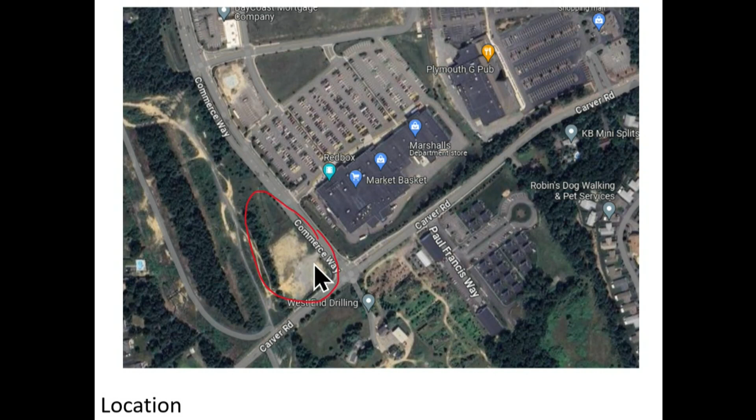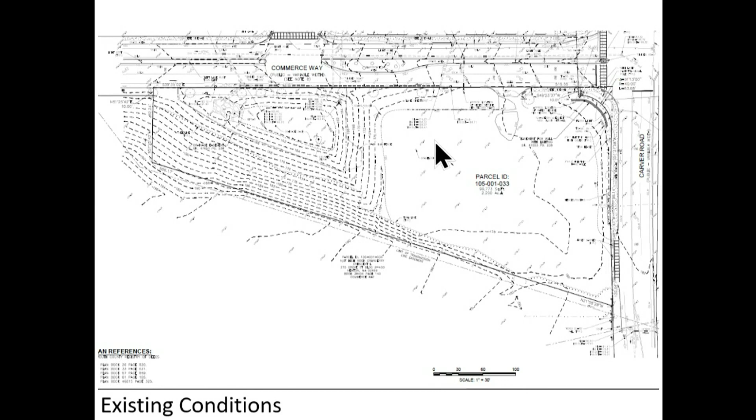So here's the cleared site, about 2.3 acres, a portion of which has an existing drainage swale. This is the development pad. Again, existing conditions - you saw the satellite image, but here we go. You can see on the topo there's a depressed area for drainage to the north of the site. This site close to the corner is the portion proposed for development.

Here's a colorized plan. This wasn't in your package - we pulled this together to give a better visual aid. Incidentally, this also does supplement the landscaping, which was one of the West Plymouth Steering Committee's requests. GPI can get into that, but you can get an idea for the layout here.

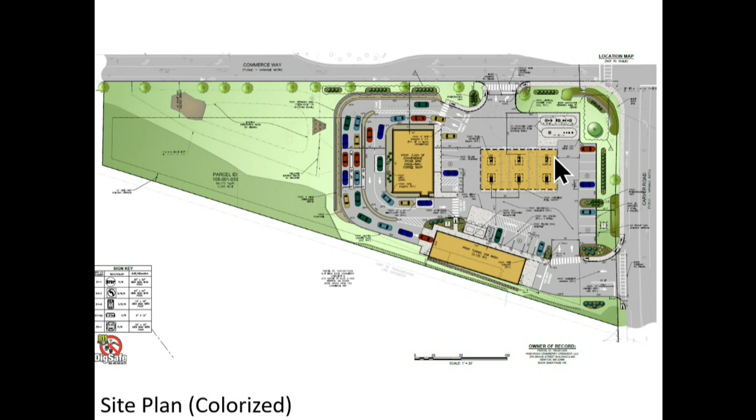I won't belabor it since you've seen it in your plans, but as an overview, you've got the fueling stations here, 6 pumps. You've got traffic circulating through the site, some of which may go through the car wash, some through the drive-through for coffee, and then parking around the site for the convenience store. You can see the 2 curb cuts here onto Commerce Way and onto Carver Road. I'll let GPI walk you through that in more detail, but wanted to give an overview. I can pull this up if GPI would like to direct you through the plan.

Going through, we've got grading, drainage plan. This is that original landscape plan - it's not colorized, so maybe not a great comparison, but I'll scroll down. This is the new plan. We did beef up the landscaping quite a bit in response to one of the concerns expressed by the West Plymouth Steering Committee.

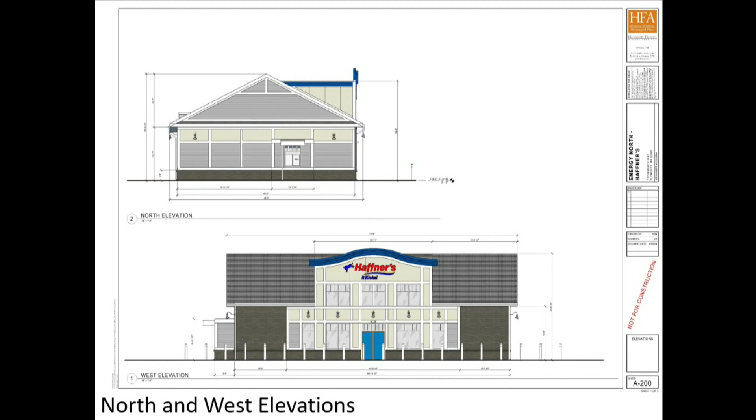Let me see - got some elevations here to show you. I don't know if these made it into your packet. I think they did, I think they were part of the plan set you received. This is what the Haffner's branded convenience store will look like when constructed. Got a couple elevations here. Don't want to spend too much time.

I think one other thing that bears mentioning on this project is, not only is the use and the site permitted under that existing special permit - we're back to satisfy that condition and show you the specific use proposed - but in 2013, the ZBA, subject to advisory vote from this board, did approve a quite similar proposal, actually for a bit larger of a structure. It was a single structure, 6,800 square feet, that sprawled across the site a bit more and had tighter ingress and egress from the 2 streets that it abuts.

But again, that was a similar project in the sense that it had the car wash, the convenience store, and all the fuel dispensers. So I'm hoping that we're not breaking too much new ground between the existing special permit and the subsequent permitting history of the site.

But that's the overview I wanted to provide to you. And if I could, I'd like to turn it over to GPI. They're here on Zoom, and they can walk you through more about circulation of the site and speak through a couple of the West Plymouth Steering Committee comments that I'm sure you'd like to hear about. Thank you.

Okay, thank you, Rob. For the record, my name is Chris York, I'm with Greenman-Pedersen. Rob, can you bring up the old TEC plan, or should I just share it? There it is. I can do that, and I've got the overlay too, Chris. I don't know what you'd like to see. Sure, yeah, we can start with this one.

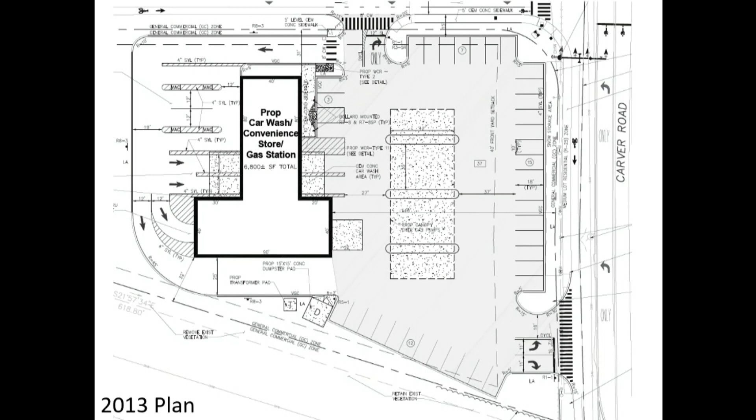Some of the big changes to the plan that I think make our plan a lot better, ultimately, is the pavement setback. As you can see, the red is the original TEC plan. We're holding a 20-foot setback from pavement to the edge of the right-of-way. The old plan had 7 feet along Carver Road, so there wasn't a whole lot of green space along the perimeter of the property. Another concern on the old plan was cars coming up Commerce Way, turning right into the site in order to get into the drive-through.

They almost had to do basically a U-turn, a 180-degree turn, to get into the drive-through. That's a tough turn — it would have been a tough turn. They wouldn't have been able to stay in their lane on site. It could have caused some issues out on Commerce Way with cars turning slowly into the site.

Our design has a much more gradual entrance into the site. The drive-through is further into the site, so it gives cars more room to maneuver into the drive-through lanes for the car wash or the convenience store. Again, the other main concern with the original plan was that the exit for the car wash dumped out right into the canopies — not the safest design. Our car wash is down here, kind of out of sight from the rest of the site, with a safe entrance and exit into the car wash.

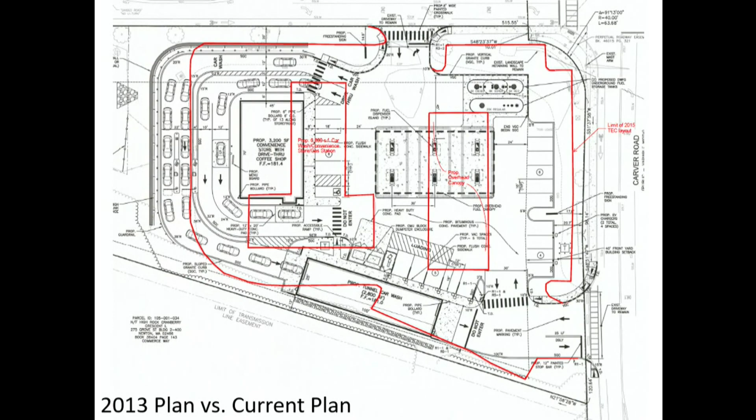So just wanted to point out some changes to the plans. I think it's a better design than was originally approved. I went to the West Plymouth Steering Committee about a month ago. They definitely raised some concerns, and some of them were warranted, so I can go through a couple of them.

On landscaping, they brought up that they wanted more landscaping shown, so we updated our plan — that's the colored plan Rob showed you a few minutes ago. Along Commerce Way, there are existing street trees that will remain. On our newest landscape plan, we've added some new low-growth shrub areas in between the trees to augment that landscaping.

We added some landscaping behind the existing Cranberry Crescent entrance sign and wall, including another decorative tree. In addition to what was already shown on the landscape plan, some of the interior islands are landscaped, and we added some landscaping along Carver Road. So I think this site is pretty well landscaped.

We can certainly take any more feedback from the planning board, but we definitely wanted to address the steering committee's concerns by adding more landscaping. Their other main concern was interior circulation, which I didn't ultimately disagree with. Their concern was cars coming out of the drive-through, and cars coming in from Carver Road into the site, with the possibility of cars coming head-on into each other. We talked about this after the meeting the next day, and we're definitely willing to add some internal circulation signs.

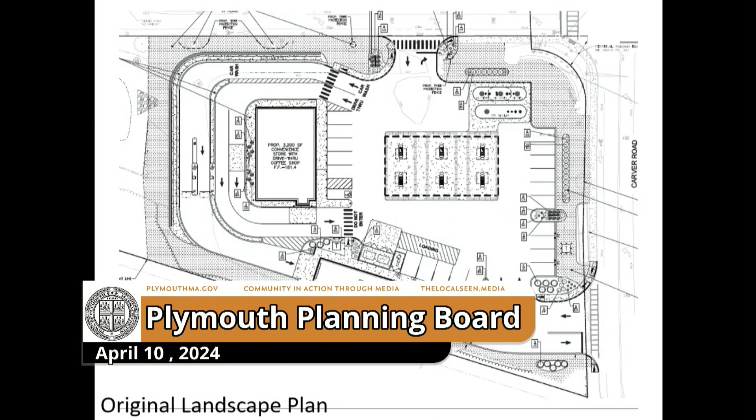Go to the landscaping one. Does it show the cars on the landscaping plan? No? Let's see, I think that's a bypass lane, Carl, in case cars get stacked around right there, just in case someone wants to get around and through without ordering a coffee, if the line's too long or something, they could come through. Is that correct, Chris? Yeah, it just serves as a bypass lane in case someone needs to get out.

It's the same idea with the car wash. Once you get through the pay stations, there's still an emergency exit right before you get to the car wash tunnel. So we're not seeing an emergency exit from the car wash, and that was going to be my next question. So if I get stuck in those 2 lanes of the car wash, and then I decide I don't want to go in, where's my exit?

So I think, Carl, you could cut across this hash-marked area. So that hash mark area? Okay. Yep, that's a paved area, just painted lines. Yep, that is your way out. All right, I just wanted to, okay.

For me, I'm only speaking for me, everything on that left side with all the vehicles just looks busy. We shouldn't have put so many vehicles on the plan. Yeah, it just looks busy, and I could see how it could be confusing, especially as you're coming into the property and also trying to leave the property. So I was just wondering if that extra lane was needed, maybe to reduce confusion or reduce so many cars going into that area.

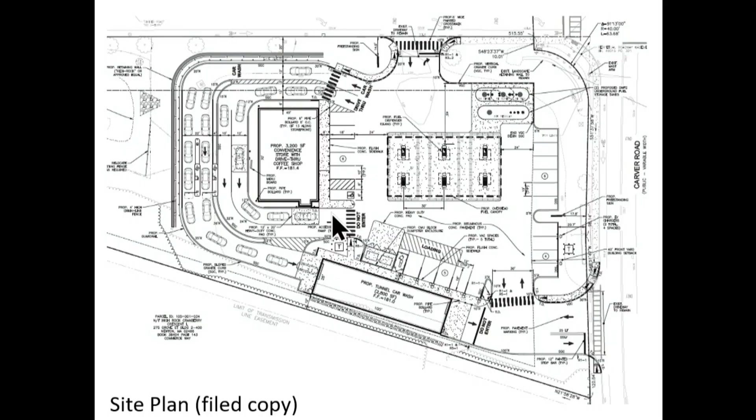And I get what you're saying, but I'm also saying that area has a lot of traffic, and there's going to be a lot of people using that area. So there could be a possibility that the line wraps back around to the other side, where if someone wanted to get out of there, they wouldn't be able to. Yeah, so, no, point taken.

Whether it's markings or some other means, are you concerned about kind of a jam at that entrance point? Correct. Yeah, because if you back up that entrance point, now you're going to back up the entrance coming onto the property. That's my logic behind it, if you understand. No, I follow you, Mr. Donaldson. Yep, thank you, that's all I have.

Thank you, I understand. But I think we could add more signage right there too, I think that would help.

Signs or more paint. Car wash right lane, drive-through left lane. A couple of signs at that entrance. I think that helps as well.

Thank you. Okay. Steve, thank you, Mr. Chair. Thank you. So...

We'll start with the statement that was made. I want to be clear, Mr. Ambrosio, I don't want to attribute language that isn't coming from your mouth, but the statement was made about decreasing the amount of pervious space. I'm looking at the two plans - I don't have that other plan in front of me, but yes, there are smaller buildings, though every inch of that space is paved. I don't think there's less pervious space there.

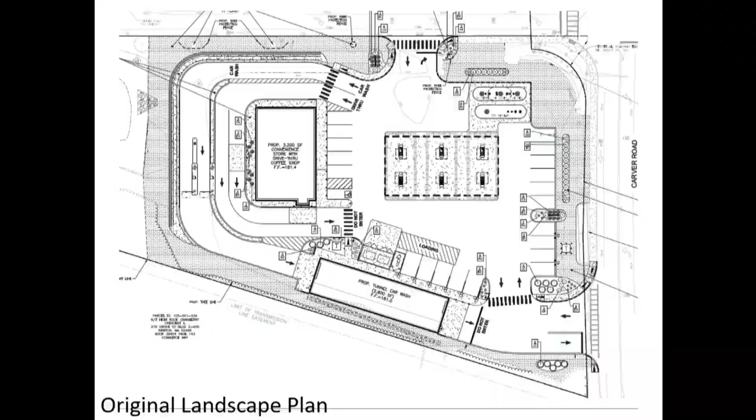As I look at almost every other convenience/fuel station, I look at parking immediately adjacent to the building, front and side, not all the way across on the other side of the pumps. That's a concern for me, because I look at where these spaces are, and where people are going to go, and vehicles trying to turn both ways, since you'll have vehicles coming in through these pumps, some facing one direction, some facing another.

I'm just really uncomfortable with the circulation, and I understand the restrictions of the site, and I'm trying not to be overly critical as a result, but I apologize, this just doesn't work for me.

And I trust you did see the sidewalk, Mr. Bolton, and the crosswalks here - that's the intention anyway, whether it assuages your concern or not. The theory is crosswalk to sidewalk, crosswalk to another concrete sidewalk for the convenience store. Sure, but if someone is parked in those spaces across, almost adjacent to the pumps, closer to the corner of Carver and Commerce, they are not walking down to those crosswalks.

I appreciate the goal of directing people for traffic purposes, and I also recognize the reality of people not following directions. So this is sort of that worst case scenario planning, if you will, of what happens if.

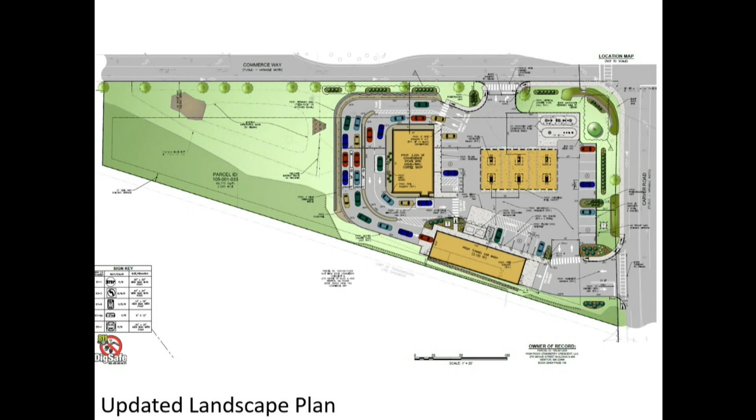Yeah, Rob, at the end of the site plan set we show the signage. So I don't know if I grabbed that one. If you want to share your screen, Chris, you could dig it up. I didn't want to put all 22 sheets onto the PowerPoint. See if I can... not helping this, site's too crowded. Yeah, I think Chris is going to pull it up, Rosemarie, so we could take a look here. Let me see if I can find it.

My concern is the drive-through and car wash stenciled or painted on the asphalt. With time and weather, those are going to disappear. So how are people going to know?

No, those we'll repaint as they fade. I think the petitioner has as much interest in clear signage as anyone else, so I'm sure they'd stay on top of that.

Overhanging? No, the freestanding sign is going to be signage for the overall facility. The drive-through car wash will be a painted stencil on the pavement, so that'll get repainted as it wears.

Okay, and unless I missed it, where is the trash? The dumpster enclosure, the fenced-in area? They have it in a fenced area, kind of near the car wash on the western edge of the site.